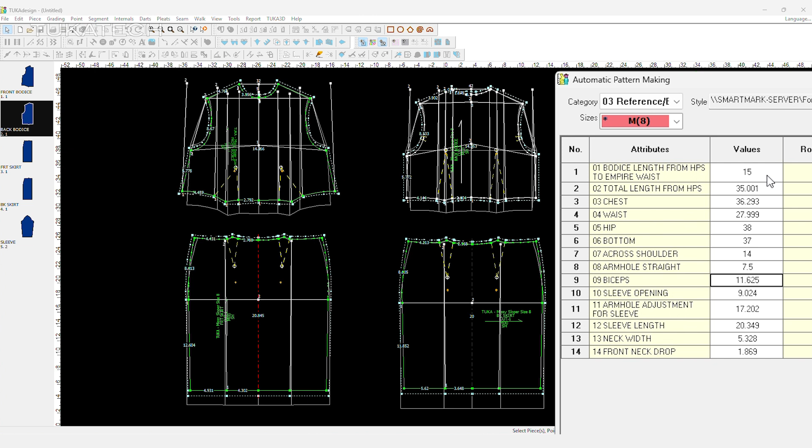Hit Exit Now to prepare the front bodice. Close all the internal and reference lines on the bodice. Select the piece and use the Delete Half tool to remove the mirrored part, so we're only working on one side.

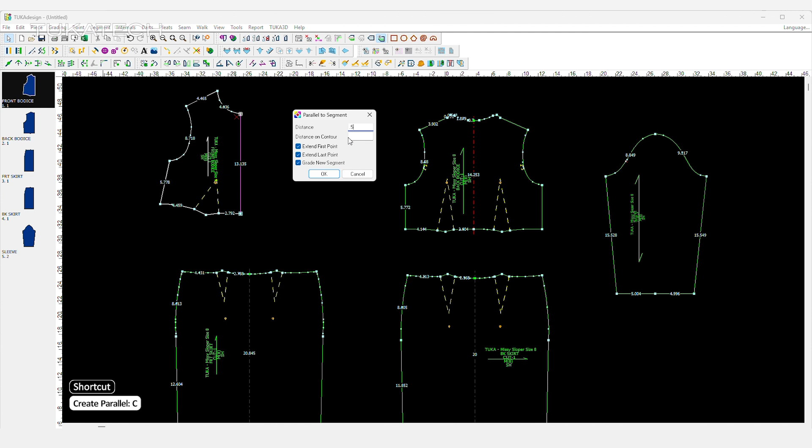Now let's create the placket. Select the center front line, use the Create Parallel tool, and set the distance to 0.5 inches. Convert this line into a contour with the Swap Segment tool, then connect it to the outer edge. Repeat the same step on the front skirt piece.

Finally, add a 1.5-inch seam margin on each placket fold.

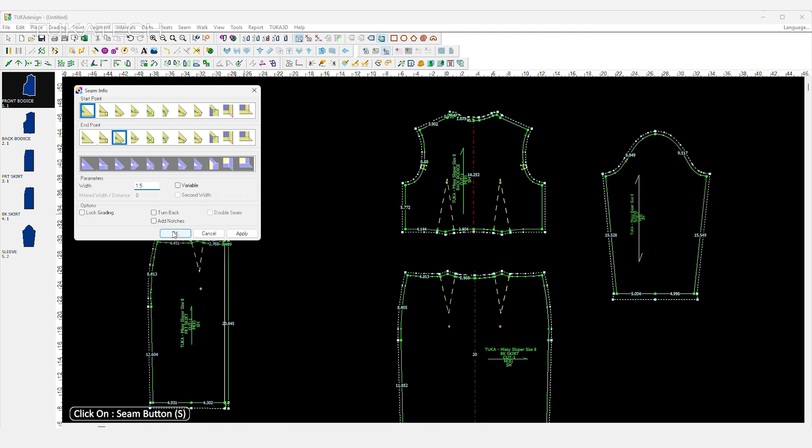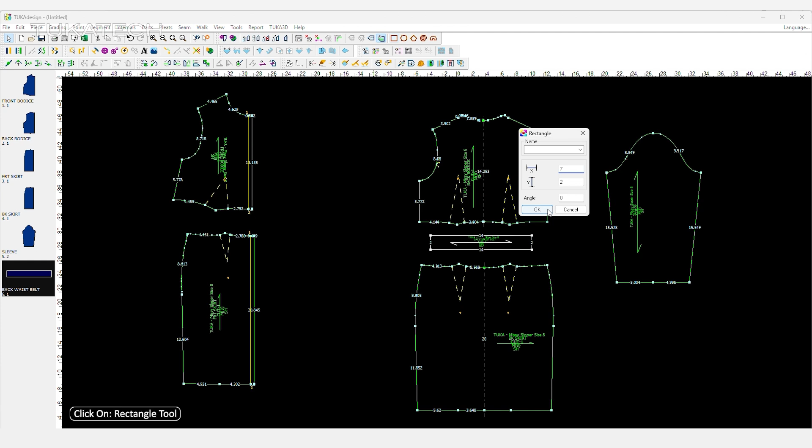Next, we'll create the waist belt. Draw a rectangle 14 by 2 inches for the back waist belt, then another 7 by 2 inches for the front, extending it neatly at the placket.

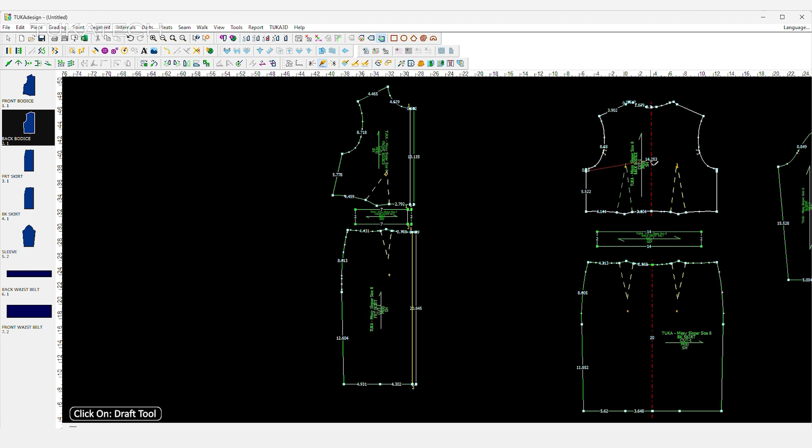Now let's work on the yokes. On the back bodice, draw an internal line with the Draft tool, and do the same for the front. Separate both yokes using the Build Piece tool.

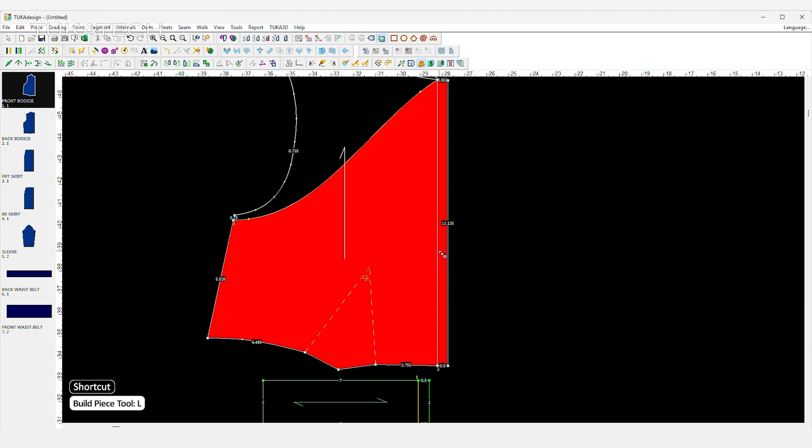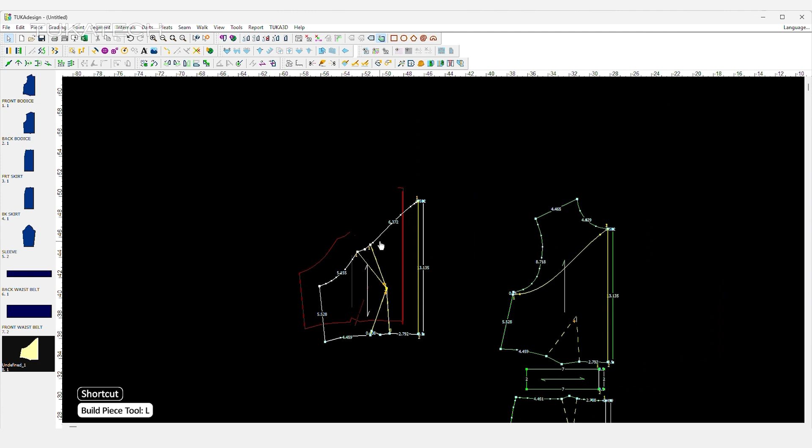For the waist dart, we'll convert it into a princess seam. Redraw the seam line, separate the center front and side front, and smooth the curves.

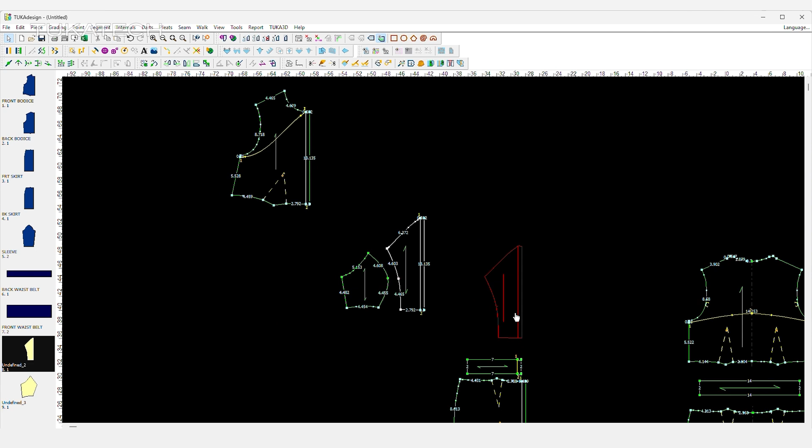Then use the Cut Along Internal tool to separate the back yoke.

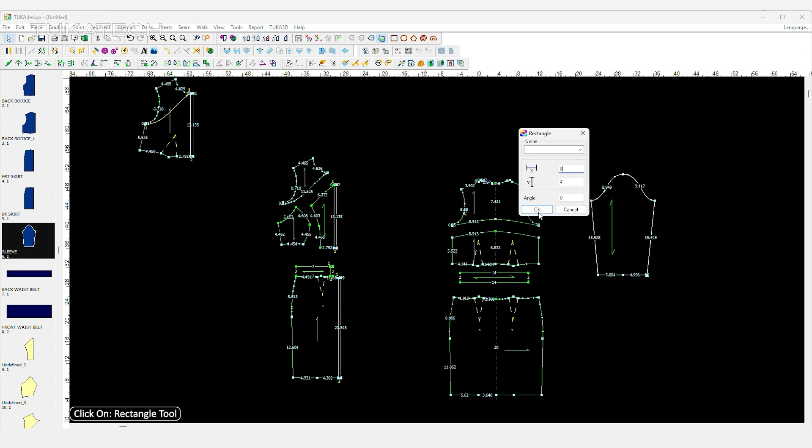Moving on to the sleeves. Draw a rectangle 8 by 4 inches for the cuff, name it Cuff, define the cuts and material, then apply and close. For balloon sleeves, select the sleeve opening and use the Multi-Fullness tool to add extra volume by increasing the opening by 10 inches.

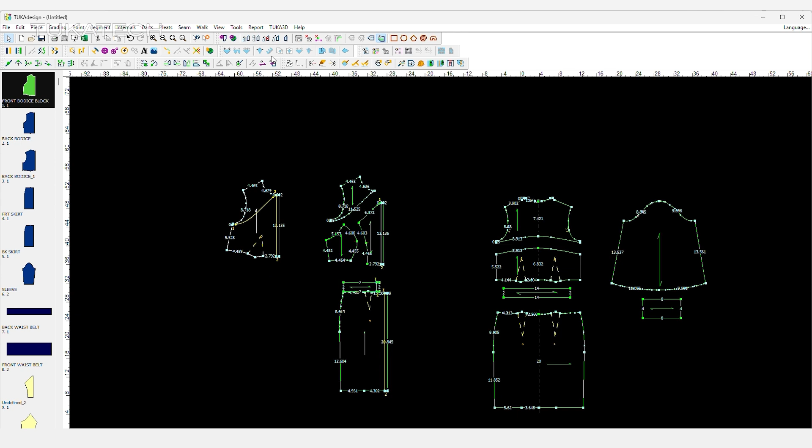Now we'll create the collar and collar band. First, measure the neckline using the Compare Length tool. The total measurement comes to 8.25 inches.

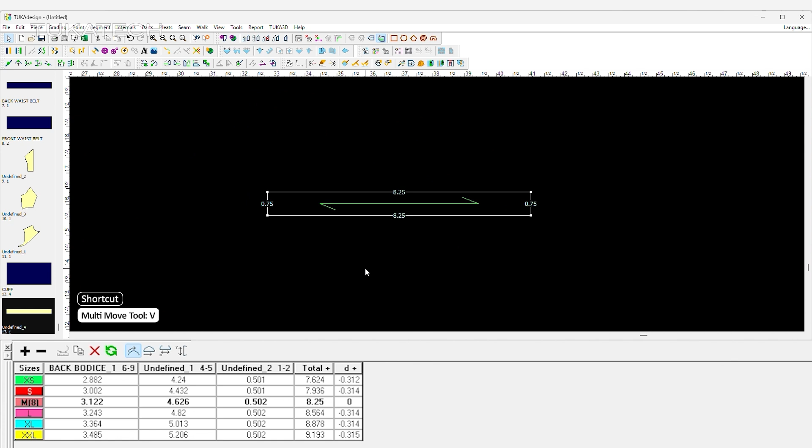Using that value, draw a rectangle of 8.25 by 0.75 inches. This will form the collar band. To shape it, round the edge with the Round Corner tool.

Then use the Set Half option to open the piece. Finally, let's draft the collar itself.

With the Draft tool, click on the starting point where the collar will attach to the band and create a slanting line to define the collar point. Enter the value.

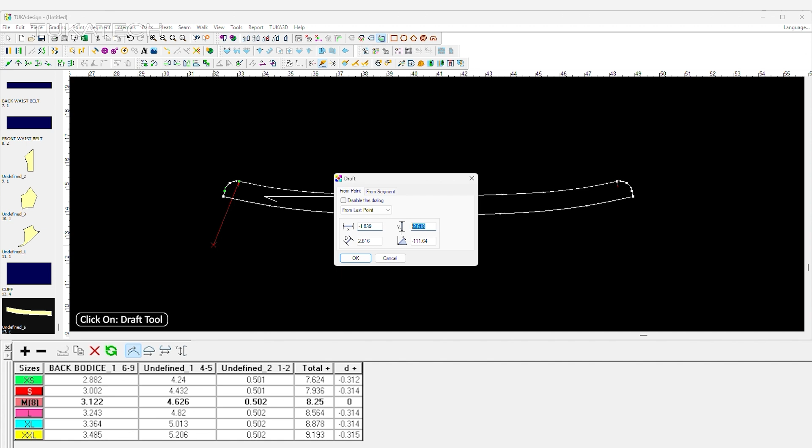Then click at the center of the collar band to set the collar height. One more click completes the collar shape. Now extract it using the Build Piece tool.